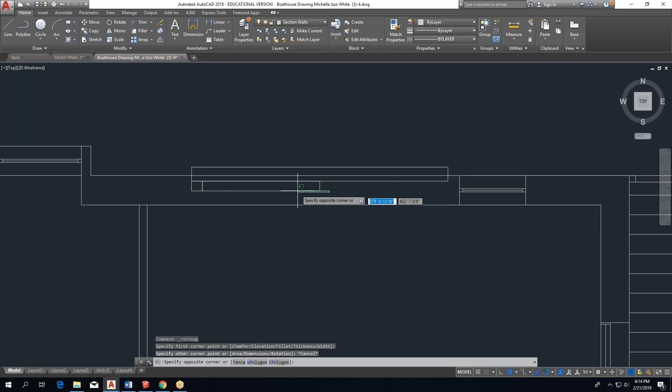So this wall thickness is representative of a lot of things. If we were to really do a cut through of our wall and get inside of it, we might end up seeing that I have some type of brick on the outside, and then behind that brick a 2x4, then some period of insulation, and then another stud, and then some thickness of a facing material. There's just so much going into the makeup of this entire wall thickness, and it includes whatever your interior finish is for this space.

So when we go to draw the walls, we can simply come up against them, keeping in mind what would happen with cavity moments like this created by the columns. This could be a really fun cutout thing where we have a column in here—let's say it was wood and then it comes and meets with drywall—I could build something unique on the other side of this wall, like a shelf.

So in this area, let's say this was like a sitting space—oh, there's this nice shelf, and it makes sense that I have a door that's recessed and I'd come and enter in this space. Or if I don't want to build in all these fancy things, it's okay sometimes to create dead space that you finish off and then finish with a hatch.

So if I offset 5 inches—I'm just teaching you in the world of architecture and drawing right now—I say okay, I'm going to build a normal wall that comes flush with this column. You might see the change from column, or I could even specify plaster to this face as well. But whatever the cavity is between this room and this, because I just wanted to fill this so it'd be a nice straight space in here, I would end up having to do some type of hatch work.

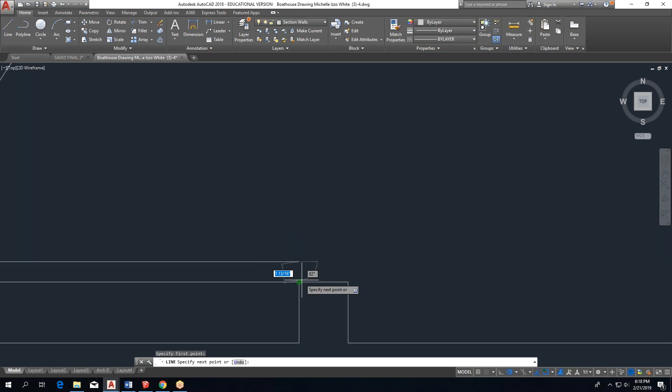And then I have to make sure I trim out the cavity of space in between here. When I trim that out, I'll need to draw my little finish to my door. So this is what a completed door looks like. It has a jamb, it has a thickness, a swing, an emptiness here that shows I'm done and completed and have decided this is my final room space.

All right, so coming into here, the space where I'm going to have my bed - not so important, you get it. The only thing I really need to teach you is walls and a little bit about the rules of the wall. So I could end a wall here because this, unlike that, is drywall or plaster or whatever I want it to be. And then in here, I could either leave this and modify this emptiness, or draw a second wall and make the cavity meaningful.

So I could start drawing cabinets in my bathroom, but really that's secondary and less familiar than drawing cabinets in my kitchen. So now that I've shown you how to draw some walls, and we get that they're 5 inches thick, let's have one more note about the double thickness.

So if I said 5-inch thickness for non-plumbing walls, and for plumbing walls that are back to back, 8-inch thickness. That just means if this was going to be a bathroom, just as I have it in my extra drawing - here's a sink, for instance, and here's my wall behind my sink.

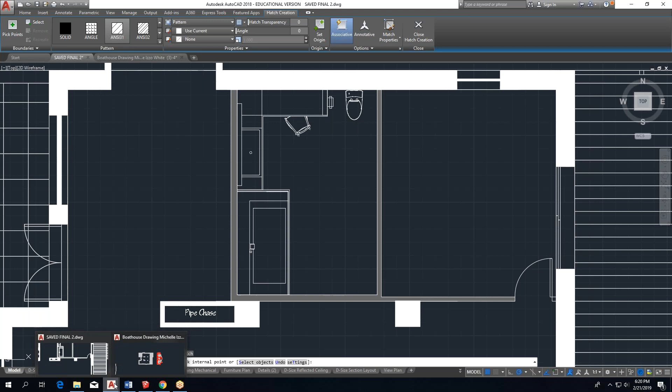And just so that's even clear, I'm going to hatch these really quick. I say really quick, but we all love the hatch tool as it tries to figure out its life, and we just hope the wheel of death doesn't come for us as we wait for it to think hard.

Didn't like it. Basically - just in case so I don't lose it, I won't try to hatch it again. But here's my sink, here's my wall. What I'm saying is if you had this same setup on the other side, I'm going to mirror it about here and copy it.

Okay, and then we had it on this side. We couldn't just set it right up against that other 5-inch wall. There has to be more space to accommodate this much plumbing.

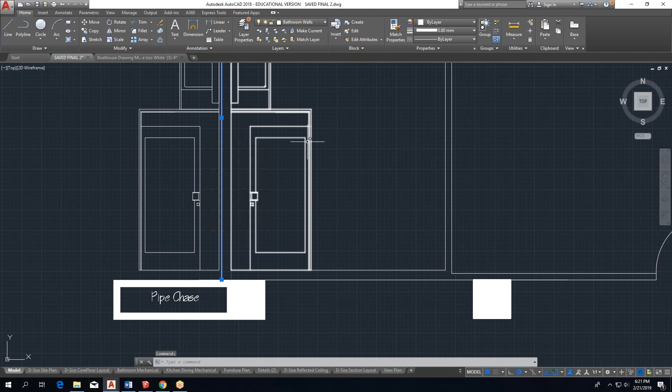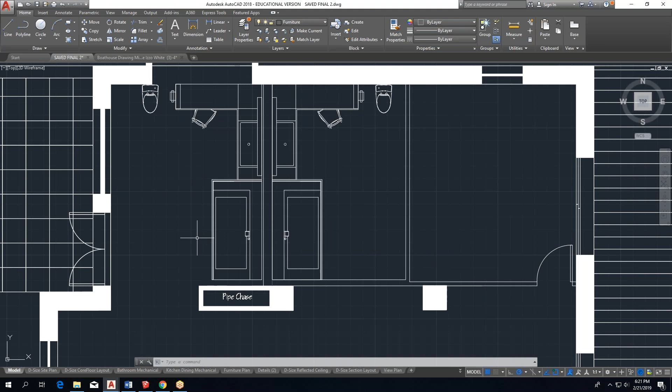We had the plumbing coming off of this chase, so we've left a good connection point on this empty part where we're going to have the main of our pipes. It's going to connect into the wall, but there needs to be added thickness for the back-to-back plumbing of these tubs and vanities. So I'm going to move this wall thickness out 3 inches to make it an 8-inch thickness, and it would end up looking something like this. So wherever you have a sink and a toilet sharing walls on opposite sides, we need added thickness for that shared plumbing wall.

Going back to Michelle's plan, I have a nice empty kitchen area where I could start drawing some cabinetry. I know that for my cabinets, they are 24 inches deep. So I'm going to start on this side of the window, actually in alignment with it - it's a nice clean marker of where I could draw some cabinets.

Before I even started, maybe you're wondering how you would lay things out. This is a visual line for me. If I was going to start a cabinet, I could say the middle would be nice, from the far end, from the inside end. I wouldn't start it randomly 4 inches into the window - I'm always thinking about how it would look in elevation as well. But is this a nice measurement from here to here? It's 16 foot 6, so that's a good measurement.

But when we think about cabinetry, we also have to think we have 30, 36, 24, 15 inch sizes. So will it be a nice clean measurement working my way from here to here with 16 foot 6? That's totally up to me and how I want to build my cabinets.

But what I do know is this 24 inch depth. So if I start again from this nice clean edge of the window, say 24 inches up, and then I could start drawing my line over this way. Maybe I'll just start by having this and say I want cabinets along this full wall.

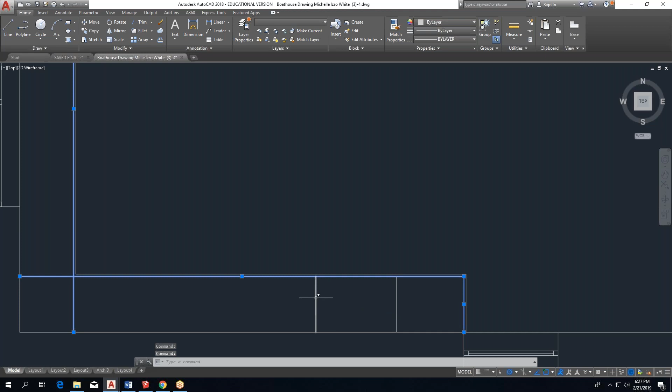So that means I have to change these to be dashed, and that's done using their individual line types. There's two ways to go about this. You could draw everything and know that you're pretty good at keeping straight what's really countertop and what's really cabinetry. So I know this is all cabinetry so far. So I could select it, and at any time, as many lines as I want to, I can right-click them.

Right-click, properties, and then if I go into their line type, I could say this I want to be dashed 2. Dash 2 is better than we saw. Dash is a lot chunkier. Dash 2 reads as a little bit less visually big for the size of the cabinetry. So I'm going to do dashed 2 and just let it be dashed 2.

Now what happens is you noticed when I had multiple lines selected and we were in their properties, it says certain things vary. So their heights in the X and Y, maybe their layers vary. Eventually we want these things on a correct layer. Now that's totally up to you. You could want it to be on just one layer, kitchen cabinets, or you could do it where you have kitchen cabinets and countertops on a separate layer and drive it like I'm doing by line types.

So let's look at it how I'm doing it. Right now they're on random layers. If we created a layer, and I'll say kitchen cabinets, or let's just say kitchen cabinets in general, since I'm trying to be really general. And then I'll add another layer later, kitchen countertops. Okay, just to show you a different way after this.

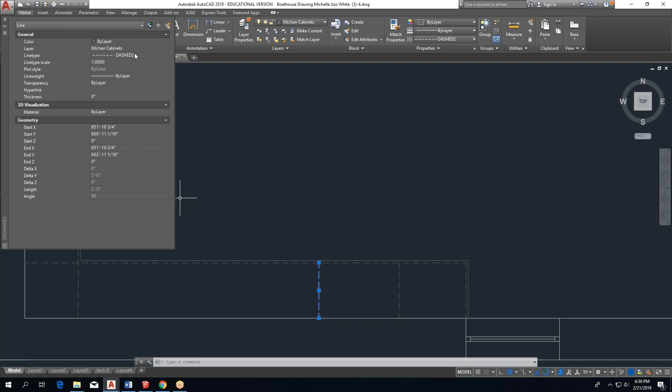But notice if I click on this line and I right click properties, it says kitchen cabinets. The line type is by layer. If I click on the dash and I right click properties, it says kitchen cabinets, but the line type isn't driven by its layer. It's been automatically set by me, the master CAD person, to DASHED2. So that's saying it's deviating from the standard of the kitchen cabinet.

So I could go in and manually do all of this work and pick what I want to be dashed and pick what I want to be straight and have all these things turn off, but just have some of them manually dash and be on kitchen cabinets.

Another way that I could have gone about it is to have a layer that's kitchen cabinets and then have my layer properties, a layer that's kitchen countertops that has a line type that's not continuous and is in fact dash 2. So if I go into its line type and then I change that to dash 2, if I make kitchen countertops my active layer...

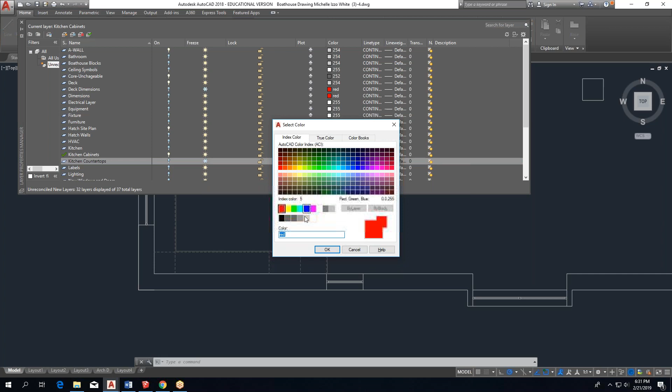And let's make it a not ugly color. Let's make it just a normal gray for now. So it's 251-2. Mine was frozen. I'm unfreezing it. And then I'm going to double click it. It says, and we're going to turn it on. So mine needs to be light bulbed on. Now it's active, kitchen countertops.

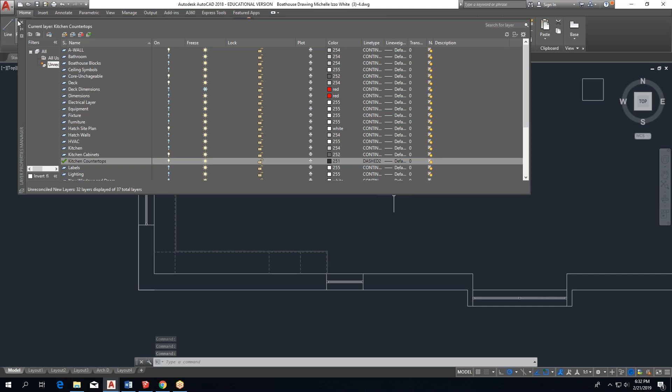DASHED2 has been set in its line type here in the layer properties. If I go to draw the line... it automatically knows that anything on that layer will be dashed. That will prevent, if you're someone who wants to be extremely organized and doesn't want to have to go back and manually change things, you can do that. I'm more in the moment like this, and as long as my cabinets turn off all at once, because that's all I need them to do for future plans, I just do it on one layer. But you can totally have a layer where color and line type is driven by the layer itself, instead of going in and manually making some things dashed, while they all sit on the same layer.

Does that make sense, the difference between those two approaches? Just one yes? Any questions? Maybe that's a better way to say it.

All right, so if I'm sitting here, I've got my cabinets underneath, and some solid lines representing the countertops that sit on top of them. What about upper cabinets in this situation? What kind of lines would I have for those? If the countertop is solid and sits on top of the base cabinets, which are hidden, and the upper cabinets sit higher than the countertop, would they be dashed or solid? Who knows?

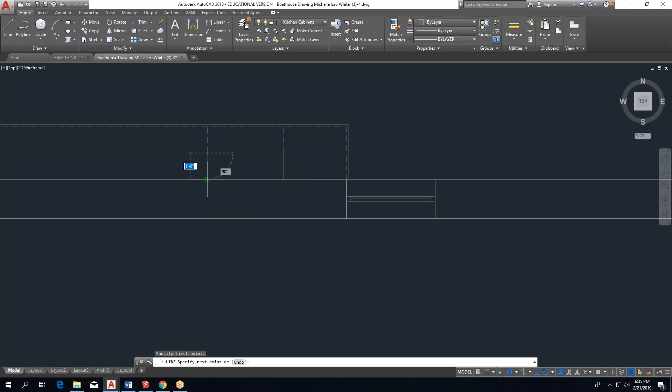So if I had a 30 and a 36, I could start doing a similar offset. I could take from here and do a solid line—say there's one above that matches with that, and a solid line here, there's some above that matches with that, and continue across. Now this might be one up here that has doors that open out, so they'd swing left and swing right, but it's still just one cabinet with two 15-inch face doors on it. You wouldn't separate them into little squares just because there's two sides to them—it would be a continuous cabinet.

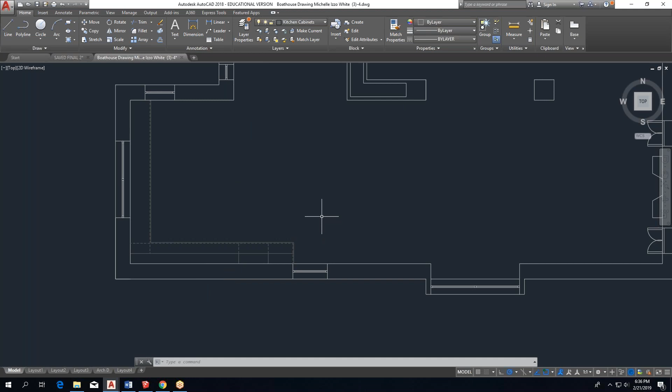But what really matters is upper cabinets are solid, lower cabinets are dashed, and the countertop is represented as a solid line as well. Two ways to control it: all on kitchen cabinets, or by having a kitchen cabinets layer and a kitchen countertops layer, where kitchen countertops is dashed and kitchen cabinets is purely solid. Right, it's a lot to keep track of. But it's really not, because it's all pretty simple after that.

The only things different than the bathroom are the sizing. Here we had a 24-inch offset, and then including the inch, 25 inches to completion. But in our bathroom, vanities are a different depth, usually 21 inches deep. And if we add that extra inch, it's going to give us 22. So if I want to have a good layer, I could create a bathroom cabinets layer on which I do everything—bathroom cabinets.

And boop, I could come out. If it's still defaulted to this, I'd have to set bathroom cabinets as my main layer. Could start drawing. I'll just start from this lower wall in here. I'm going to come over 21 inches under and start drawing up, and I'm just going to complete it to here. I have no idea what size that is, but I just want to give you the idea of the depth. So when you measure, it should be 21 inches.

Let's see. And I'll confirm it with an offset, 21 inches, or I could have started with an offset. Your choice. I think I did a little bit too much of a pull on my first one.

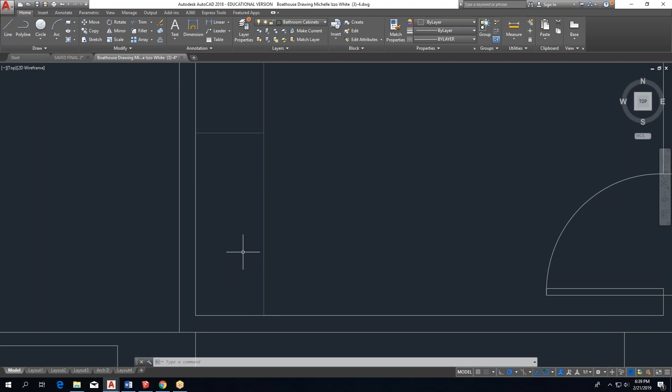This is where my little sink basin's going to go. And then I could have this just be open underneath. It could be like a vanity where I'm sitting there, kind of like a desk to put my makeup on. It could have one drawer, so it might not even have cabinetry.

This one, and for the whole thing, I'm going to need a countertop, which is going to give me an added inch of thickness, so I'm going to offset 1 inch. And again, you could do it on the side or you could have it end on the face. That's totally up to you and how you want to finish your things. I'm filleting the corner.

And so in here, I would have my 30-inch sink basin, and it's going under my countertop. So all these lines so far would need to be dashed. I could create a new layer that would be my bathroom countertops and then change its line properties. So this time let's do it that way, because that's the way I haven't done it.

So I would say layer properties, bathroom countertop. And I'm going to show you how, hopefully, changing it here and then selecting them and putting them on the layer should change things. So if we change this in here to be dashed and click OK, and then we make this the active layer, close out, and select this, this, this—and we haven't messed with its layer, and we haven't done the right-click properties stuff—and we just go and put it on bathroom countertops, it should change all of those lines to be dashed because we put them on that layer and we haven't changed their properties individually. So that's another way to do it.

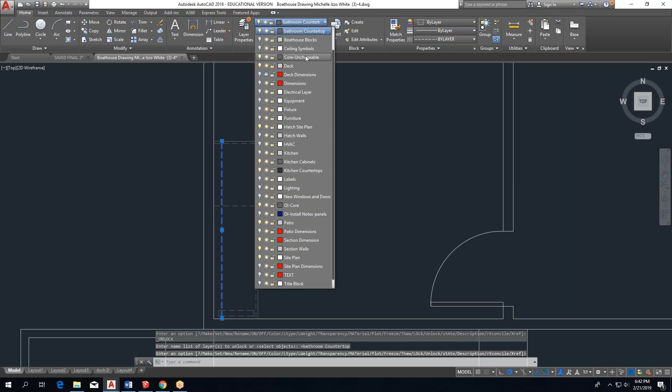Oh, I know, this is good to see. So if you ever lock a layer—see how this is locked?—you've got to unlock it. It didn't want me to move it because it was locked. It's as simple as unlocking the lock.

So now I could have that big vanity cabinet that's running my entire length, which is kind of silly, but it would be solid. And if it is running the whole length, I would not see this portion of the cabinets that's underneath it—it would get chopped off, or I would move the node.

Allison, I have a quick question. So for space plan, I already put in a couple kitchen blocks, like for my sink. So for the upper cabinets, for that solid line, would I need to erase part of that sink block? Not a block that I built out?

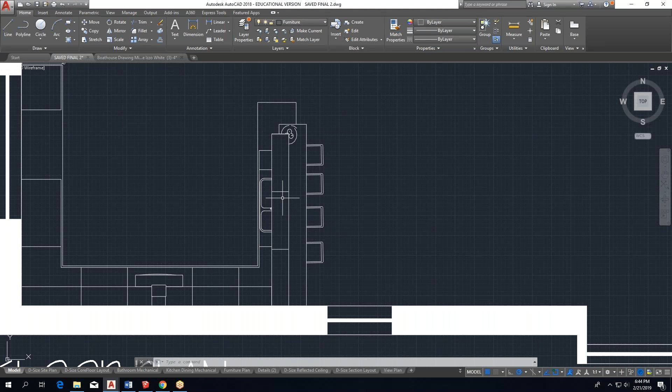Yeah, so if we go back into my saved final, you can see how it would look. See, you can see my sink, but here I have a floating cabinet that's attached to the ceiling, and it'll cut off where you'd see the handles. It would cut off anything below it that you wouldn't see because of the edge of those cabinets.

So coming back in here, that completes all of the rules for the bathroom cabinets. Pretty simple, I mean we might end early tonight because I'm making this way simpler than usual. So kitchen, bathroom: 24-inch standard size of cabinet, 25 including countertop, uppers solid, lowers dashed, countertop solid. Bathroom, same thing, different depth: 21 inches for our cabinets, 22 to the finished edge with the countertop, that solid countertop line.

And then of course the rules of cutting things off that you don't want to see. I'd in fact want to cut off this little foot too, so that I wouldn't see it as much, because it'd be underneath all of this.

Make sure when you're drawing your walls that you're putting your doors cut out fully with their swings and their thicknesses. And then for closets, I said you could have pocket doors or folding doors, but if you have doors, you draw them correctly. So I don't know how many doors you guys have drawn, and some people in this class aren't in space planning to see all the really fancy stuff that goes on in there.

So if I had another opening, this is the messiest way—look at how funny this is. There'll be one giant wall and then one little wall, and in between this gap, a strange gap, I'd have doors. I could take some folding doors—this is my folding door, and I'm going to mirror this.

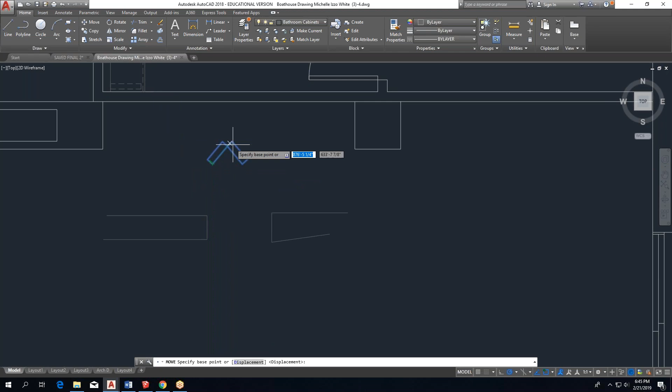And that could be one set of folding doors that I move into position, and they hinge at their center. Now the rule about folding doors is, let's say if I have two—if I actually unfolded these, they should measure the distance of this gap. So if I was going to draw them in reality, I would want to measure this strange gap, 2'9" and 13/16, and then take that measurement, divide it by 2, and create two rectangles that are those half measurements and hinge them.

So that would be something to be very precise about, because sometimes I'll get people who give me a gap like this and they just really quickly draw a door and then a second door, and it becomes this unbelievable thing that's also kind of jutting into their space. Make sure they're rectangles, not like this mess I've got going for myself. Clean drawing habits will go a long way and will be checked for in both classes. So if you're spanning a gap, we want this unfolded length of these two things pushed flat to be the clear space of this gap.

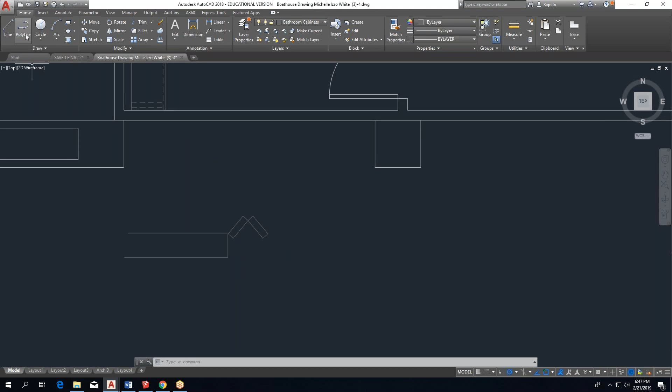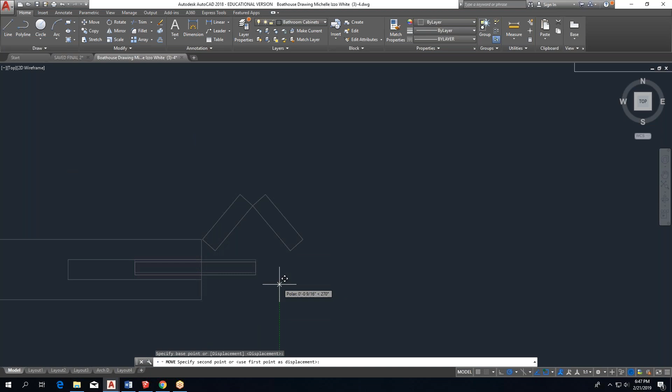A pocket door is represented—you might have a cavity on one side. So if I went over here and offset 2 inches, totally arbitrary by the way, I'm just creating myself a cavity for my door to come into. And then I would have the actual pocket door that could go into that cavity. And I'll move it into place so you could see how you'd be using the door.

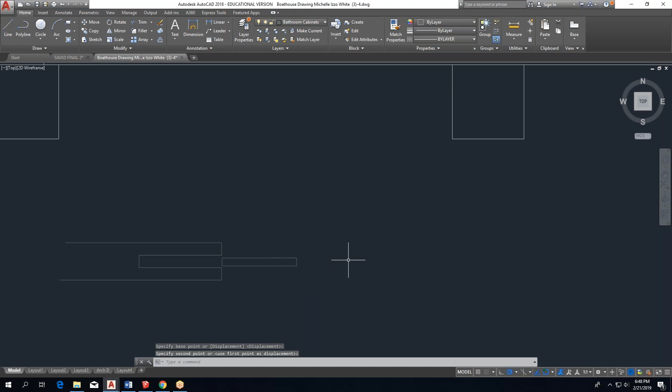Our CAD should tell us something—that means secretly I've got to remove this ugly line here. And then people get the idea of, oh, this thing could slide in here, or it could slide out and be the size of the clear opening. So you'd have your opening meet up with it on the other side over here. Okay, so whatever kinds of doors you want to use, just make them believable. And if you have a question about how to draw something, you can always ask as well.

Closets, that was another thing I wanted to talk about drawing in CAD. They're 24 inches depth, and that 24 inches depth is of clear space, not including wall thickness.

So for instance, if I have my little guy here and he's 24 inches, that means I can't just say the closet's going to be here, draw this over and up, and offset 5 inches. No, the measurement of this empty space inside the walls has to be the full 24 inch depth. So this is going to have to move down here, and then the walls could be built. The gap itself is 24 inches.

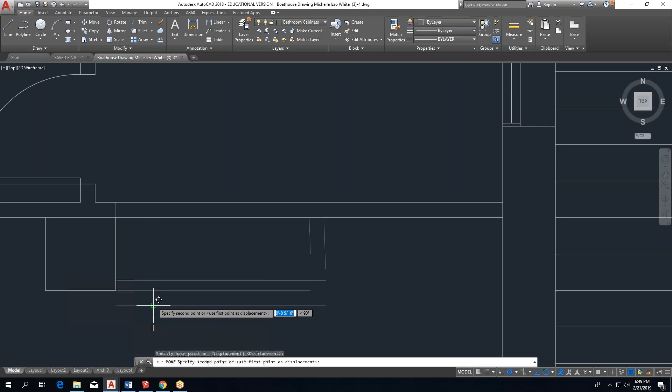Now, if I clean this up, I gain some space because of the thickness plus the column's depth. So you're going to have a lot of weird things in this house like that. If I gain my 5 inches plus 24, then I get to come in at least 5 inches on this side because of the 5 inches I gained right here. So I could fillet it all off and make it all clean.

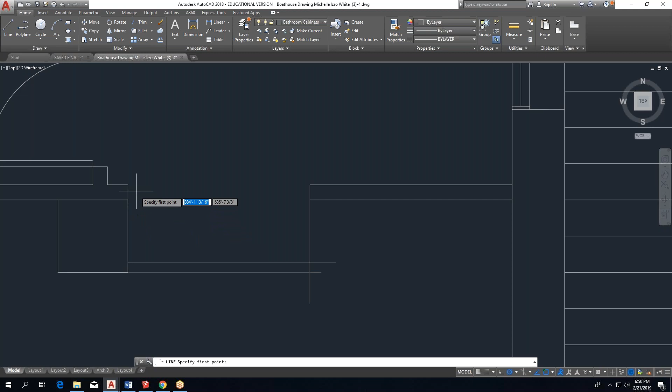Let me clean it up a bit and show you what the appropriate end would be. So trim from here to here, enter, and trim out this first line and trim this one out. Now I'm going to just draw one from here as a guide, offset 24 inches, working quickly. It's my keyboard, the inch key sticks. And move this up to be the real 5 inch.

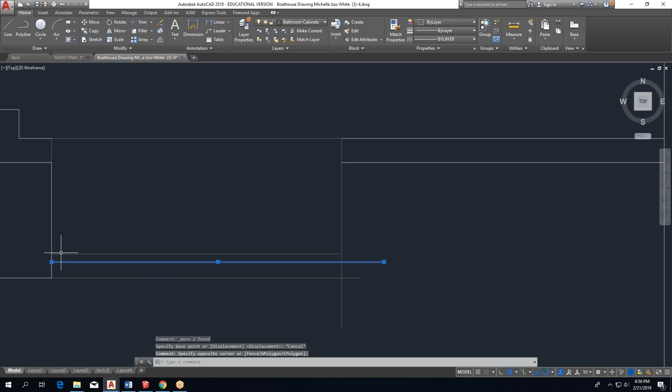So I do this, and now you see this is 5, and this is 24. So from here to here is 24. It included the thickness of the wall, which is fine because the depth of the actual space is 24. And that allows me to have this really nice clean alignment with my column. And then I could finish up my wall on the right side, offset 5 inches.

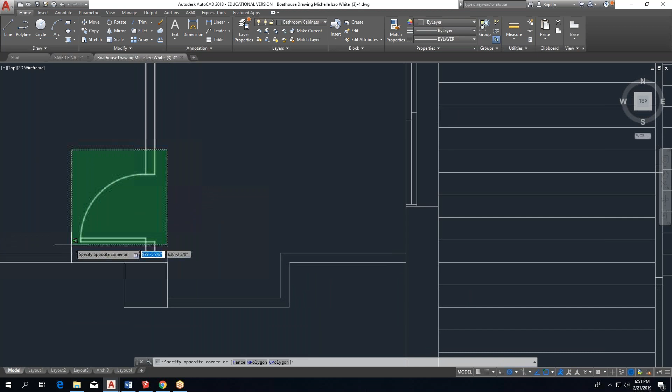All right, so there I'd have a closet. Now I would have to have some type of doors on my closet, so a line does not suffice. In my situation, I'm in trouble because I'm real close to this bathroom door. But if I wasn't, and this is the magic of CAD, yay, totally fine, then I could have doors that swing out. Still, I'm too close to this if I want them to swing out, or I could have those folding doors.

So if I did a measurement from here to the other side, I'd say it's 5 feet 2.5 inches. So half of that is going to be, half of 5 is 2.5. So 2 feet 6, 2 feet 7.25 inches, I think. That's me doing math in my head. Good luck to us all. 2.7, 2 feet 7.25, 2 feet 7.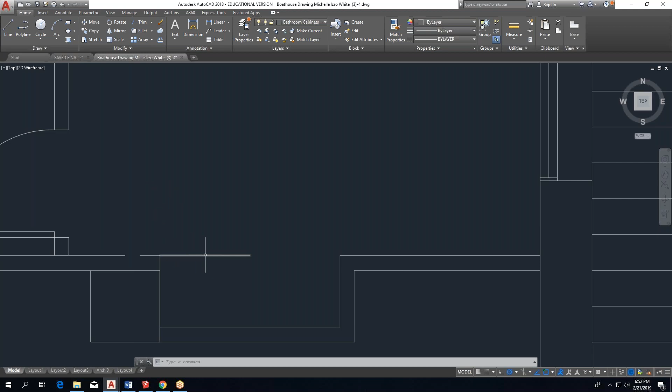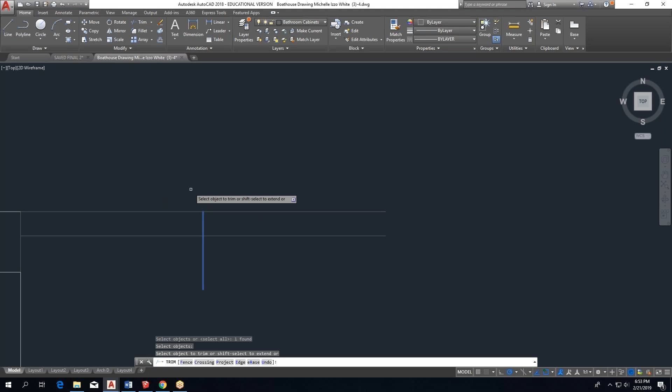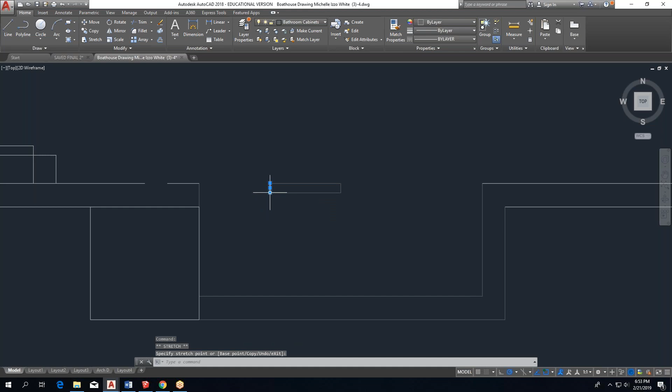7.25 inches. Okay, and if I put that down here to the middle, I could have even just drawn a line across, found the measurement, split it in half. So that could be half, and I could have 2 doors that swing out using that measurement, or I could take this and split it in half again. So if I draw a line here, give it thickness, offset 2 inches, enter, and trim from here just so I get 1, that's that measurement. I know you're kind of like, tonight I'm a strange, evil genius. It doesn't make sense, but it doesn't really matter as long as you see the end product, and you get that I did half of this opening, and now I'm taking half of that and making a cute rectangle. That's all you need to know. You could make it however you want to make it. I'm just doing it my fast, odd way.

And then I could rotate it 45 degrees, and I could mirror it, and actually let's mirror it the other way, so then it's ready to just push into place. Mirror, enter, and I move it. And that would be the clear space. And then I could copy this all over to the other side. Copy, and there you have it. I'd have those cute little doors that when unfolded would close and everything would work out.

So that's what a folding closet door would look like for our closet. And then, you also want to be thinking about shelves. It's usually about a 12-inch shelf. A shelf is going to be shown as a solid line, but a rod beneath the shelf would be shown as a dashed line.

And I've seen it represented in some of your plans as just if I did this. We could right-click properties, and in here, in the line type, we can change it to be dashed.

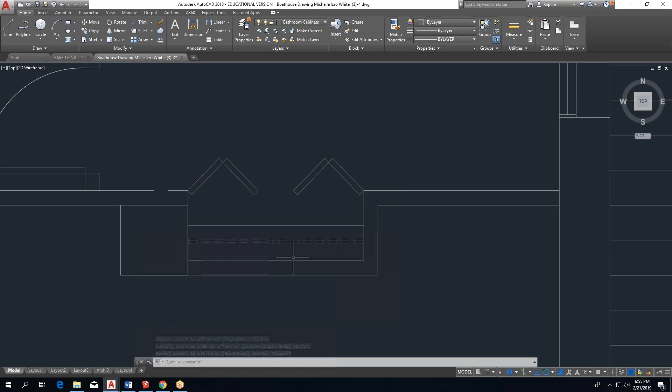So we could do negative 2. I've seen some of you represent it just as that, but I like to give thickness to things so people never question what they are. Like if it's an inch thick rod, I could offset it 1 inch, enter, and if you do an offset, it'll maintain its properties. Then I say, oh yeah, there's an inch or a 1 foot shelf with a rod at its center that you can't see hanging beneath, and it has its doors, and that's a finished closet to me that I would accept as a fully drafted closet.

All right, you could have doors that are sliding on a track, so on and so forth.

Okay, let's take a look back at our homework. So we drew in our walls for our plan, and we drew a master bath, we started it anyway. We talked about 21, 22, and we talked about all of the different types of lines and depths for drawing in our kitchen.

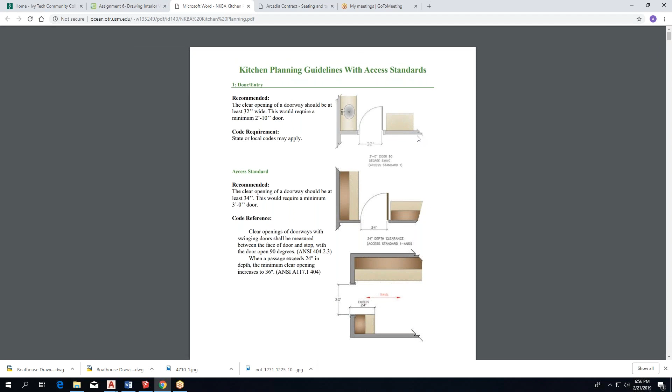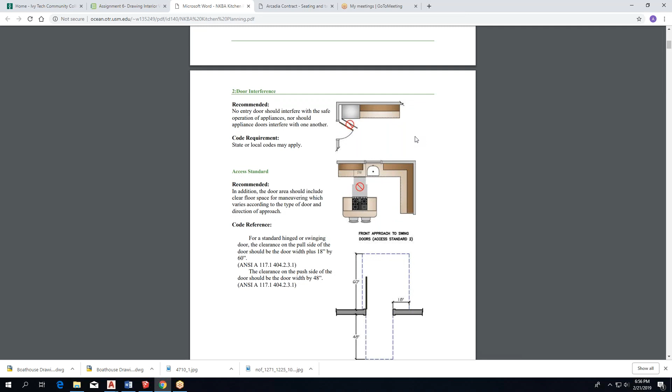And I've included for people in this class who aren't in space planning just a quick planning guidelines with access standards link that does really basic stuff. So it talks about recommended clear opening of a doorway into a kitchen, just so they have the opportunity to follow the guidelines as well, since Cheryl will be looking for them and I'll be double checking them for the other people. I would love to check it if you just want to practice that.

I used to teach kitchen and bath. I taught it twice, and I've also done independent study in it. So you could talk to either me or Cheryl. She's probably more up to speed because I haven't taught it in many years. But this is for everyone to use and just look back at.

Here's that dashing of the work triangle. So a work triangle traffic, between our range, our sink, and our refrigerator, there's certain types of distances that are acceptable. And we want to draw our triangle in, so it's from center of sink to center of range, to center of refrigerator.

If I go back to my saved final two, I would be totally fine with you putting it on that layer where it was kitchen cabinets. Just ignore my furniture because this specific drawing is pretty willy-nilly as far as its layers goes.

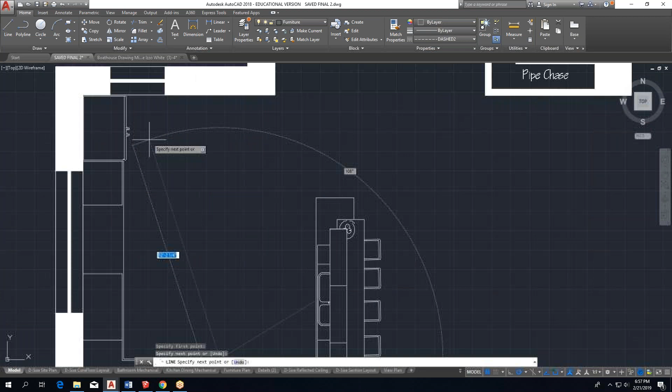But if you have a dash layer, we say, I'm going to start at the center of my sink, to the center of my range, to the center of my refrigerator, and for my people, you can see it is dash, it's just very light. My people who are in space planning have certain measurements they need to check and verify, that the legs of that triangle aren't too long, aren't too short, aren't impeded by center islands, so on and so forth. But that's how the drawing's accomplished. It'll simply be a dash triangle that falls in the middle of the plan from the center of those appliances and fixtures.

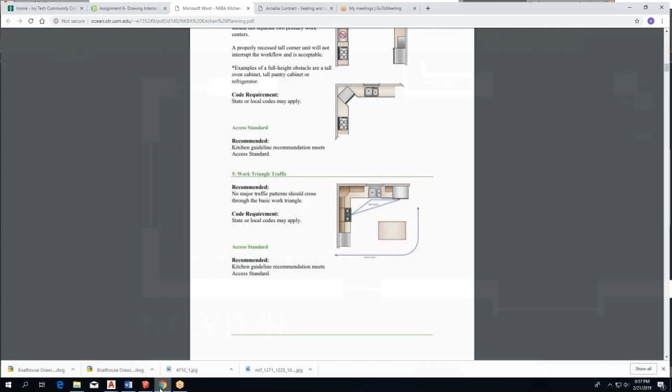All right, back out here. So the next thing I'm going to show you is tracing an image and using the dimensions from a site to scale and draw. This is really seemingly random, but it's very handy.

You still don't know why you should trust me. I never did my, this is me and here's what I did, but I worked 4 years in the contract industry in one of the 2 local companies available to us in this area, this being Mishawaka, Granger, Elkhart. There's only 2 large companies where you wouldn't have to go to Chicago to work. And I was in charge of healthcare and education, offices, tons of stuff.

I did all sorts of things, and someday I'll show you a PowerPoint where I've done everything from design a custom $100,000 chandelier, where I used SketchUp and worked with a designer out of New York, and we talked about rise over run with the stairs. I showed her my designs and we'd say, how plausible is that? Then we picked colors and materials. So like product design, I've also designed rugs locally with other companies, and then I've done offices, nursing homes and so on. I used CAD all day, 8 to 5, for many hours in a week.

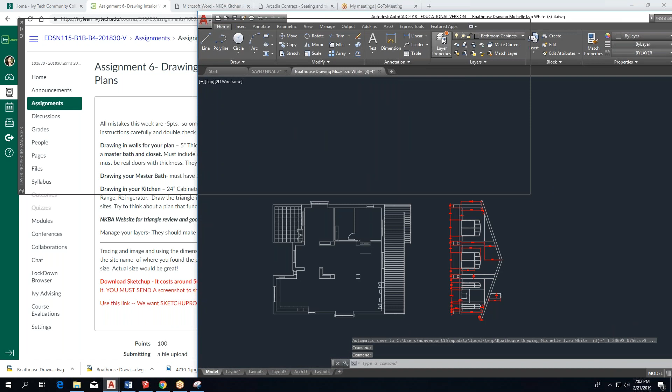I believe, just so you're on the same page as me, it says this should be drawn on a new layer called image layer. So in CAD, if I go back in, I'm going to create a new layer and call it image layer. I'm going to make it red just because I want to be able to see it really clearly, and then I'll make it active and close out.

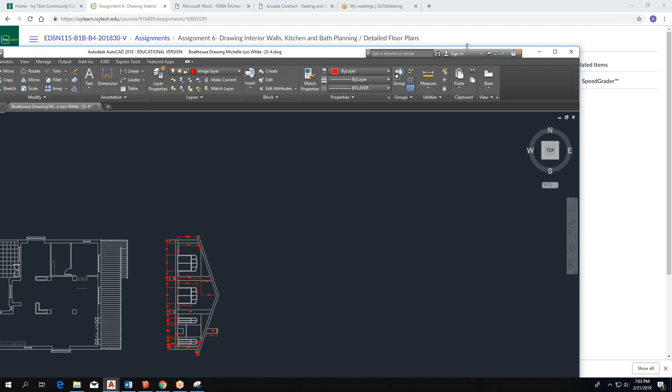Now that I have it all ready to go, I can draw my line — we said 24.5, 24.5, enter. It's not that big. And then I'm going to drag in my image of my chair.

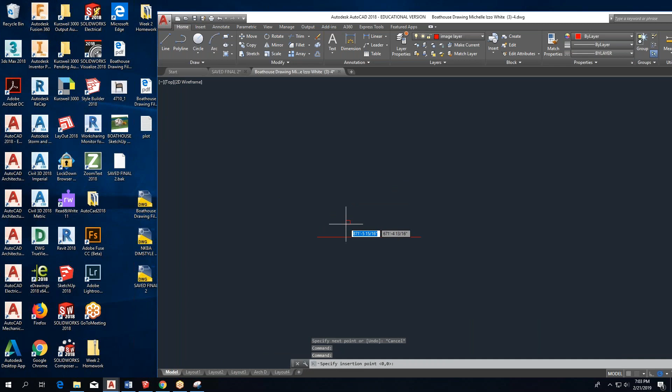So where I see it right here on my desktop, I'm just going to drag it in here and click on that piece, and we'll see how it drops it in. Oh, it was going to do it — that's awesome, so it was a little bit different than earlier.

So if I just drag this and drop it somewhere and click randomly, it's just letting me place it. Let's even do it that way so you can see what happened — if I dragged it and didn't drop it nice and close up here, then if I click on its outside boundary, it's going to pop up this menu, and it says you could create a clipping boundary.

So if I create a clipping boundary, I'm going to zoom in and clip it so that I'm basically getting its overall width — inclusive of right here to as close to the edge of the chair as I can get. That's what I'm calling that. So when I move this, I can really see how wide it's going to be. Then I'm going to move it into place up here.

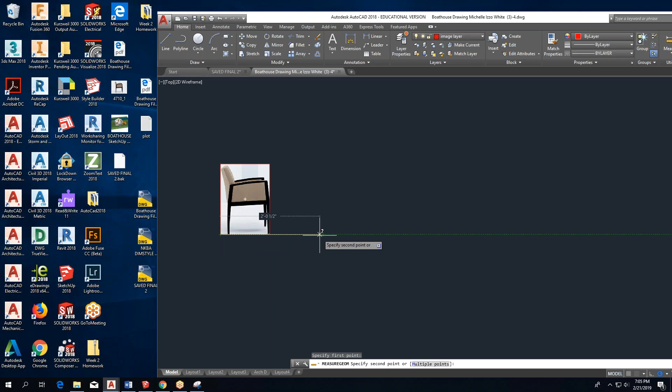This is my 24.5 line, remember—I gave myself that as a base measuring line. If I measure from here to here, it's 24.5, 2 feet half an inch. So if I select this again and go to the Home tab and then to Scale, I can start to scale it up.

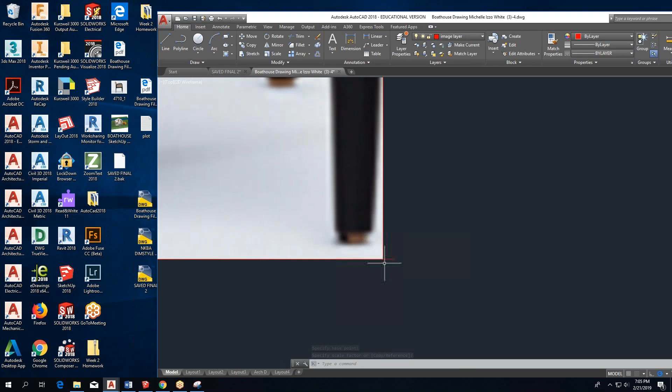I'm going to just scale it up. You see how I stopped? I was looking to the right and was so close to hitting the scale of that line. You want to be as close to that line as possible, but let me show you what just happened—I'm scaling this chair up by the width measurement, measuring against my elevation.

It's as much an elevation as it's going to be for what it's doing. So if this is 24.5, let's go back out to our website. It says the height should be 33 3/4 inches—that's to the top of this here, because otherwise it'd say arm height.

So if I drew a line from here to about here-ish, it's going to want to snap to the top of here. I'm going to make my screen bigger and turn off my object snap so you can see what I'm doing, since it wanted me to snap to the top. So I start basically at the bottom here and come up right to about here, and now I've got this line.

So what does that measure? I'll turn my snaps back on so I can snap on my line—from here up to here—and it says it's 2 feet 8 inches, so that's about 32, almost 33 inches. Do you see what I did there? Do you see how I picked its width?

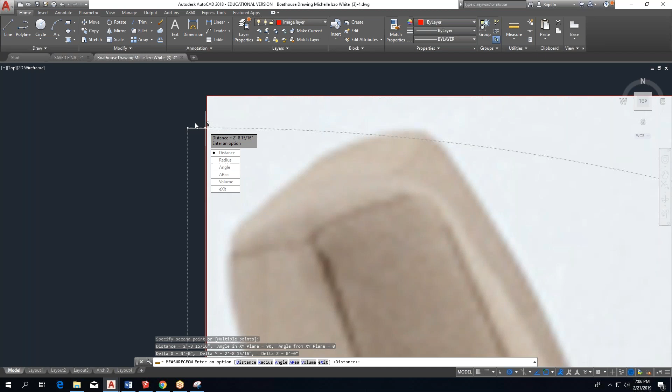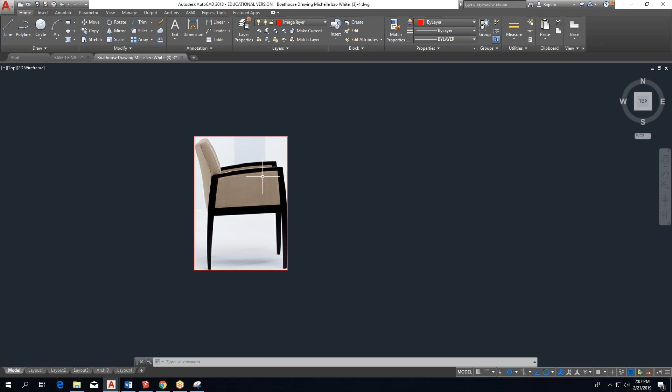I took the image and measured or scaled it to be a similar width. Since everything in here is drawn 1-to-1, it took that image and at a 1-to-1 scale made it so that if I trace this chair, I'm drawing its elevation appropriately to scale, and I could use it in any elevation drawing for my house, knowing it's at the right scale.

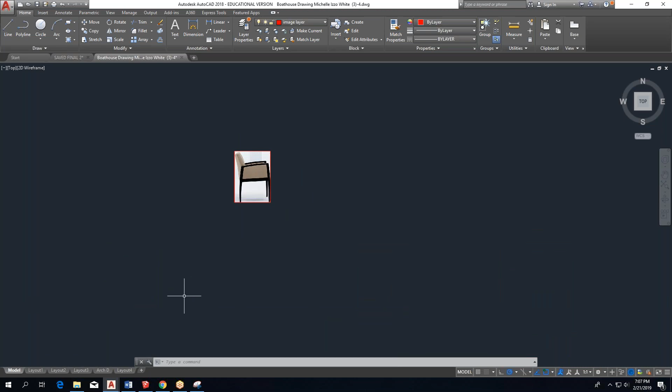It's a super weird and seemingly simple thing that's very, very helpful to understand if you're not bringing in a block. If you brought in a really cute block, it might not be the exact chair you want, but this is a good way—if you have a company that has multiple views of a chair or sofa—to go about using it to draw the reality of the object.

Now that I've got this in here and scaled it close enough to be perfect, I would have hit on this outside line and there's just no way. All I did there was make my box a little bit bigger—you saw that it dragged the white space, see? So that didn't make the chair bigger.

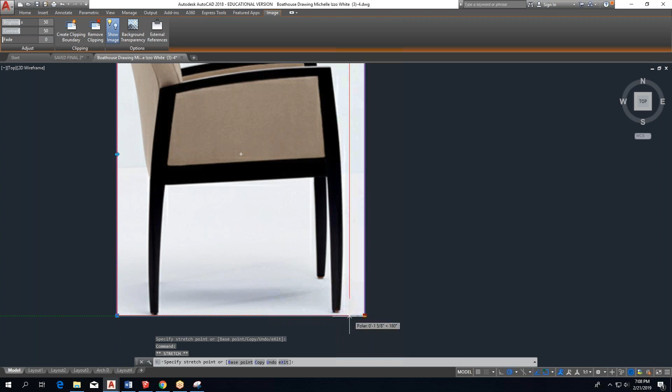The scale tool, which is under here—if I say scale, going like this, I can make it way big. Or I could grab it, go to Home, then scale it and make it way little, but you're going to see that's super frustrating. So if you make it way big, you're like, yay, made it way big. Now our line is way down over here somewhere, and it's hard to find.

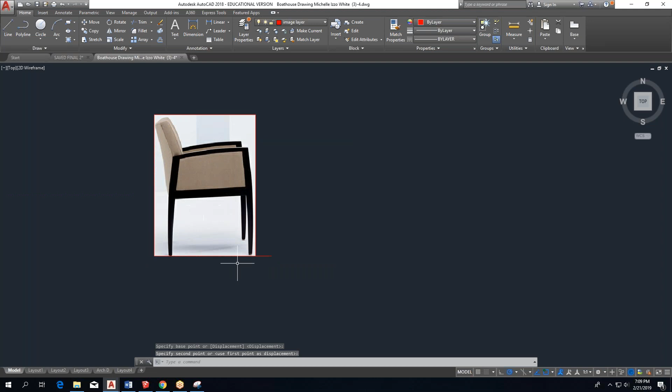So now to scale it down, I have to type decimal percentages going backwards—I could say I want this 0.75 smaller, and keep doing that until I get as close as I can to the size of my 24.5. But it's really easier to bring the picture in smaller than your 24-inch measurement. If I move this, you can see how small this line is right here, and if I move it back into place, I could keep going down, down, down—then go to Home, say scale, click about the point, and say, nope, 0.80 smaller, getting smaller and smaller.

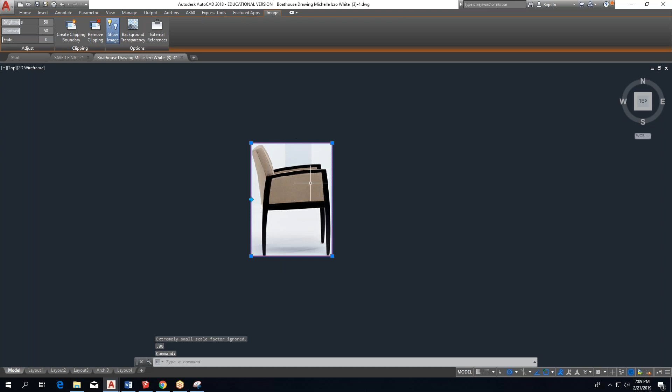And you're just guessing—that's the thing, that's the weirdest thing about this. You'd be guessing to get it smaller and smaller until it hit back up to this line.

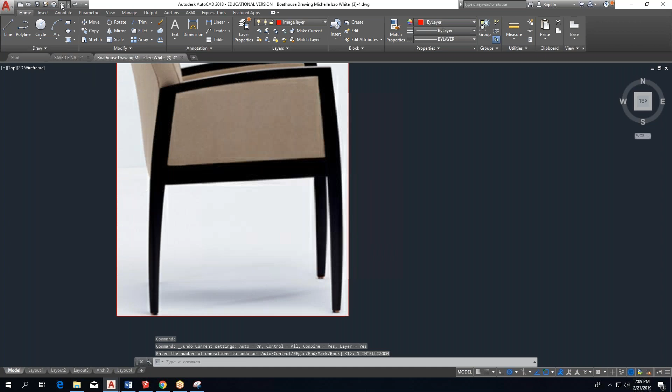There's no real science behind it besides scaling it until you match the edge of your original 24-inch measurement. When I had it this close, that was close enough.

For your homework, when I measure it as your teacher and check what you've included, I need to know where you found it. So on a new layer, you must scale the furniture within 2 inches.

I was within 2 inches of being correct with the chair, and that's not hard to do. Include the site you used to scale and draw from.

Include the link to your chair or furniture piece. That way I can go to the site and check which piece of furniture you grabbed.

If we go back to Arcadia, you cannot use the chair I just did, okay? I want you to find your own image, just to get used to site navigation and this idea.

So if you go back to guest seating, you could pick something like the Nios if you wanted, and see if it has a good enough picture.

This is pretty close to elevation. This would be like a very complicated chair, even though you could probably find it. You could use this one—actually, it wouldn't be too complicated.

If you brought it in and used the clipping tool to clip it from the foot to the top of the chair, you could give me a front elevation of a chair.

Once you get it in, your job is to trace it. So on your image layer, you're going to turn it into a CAD object.

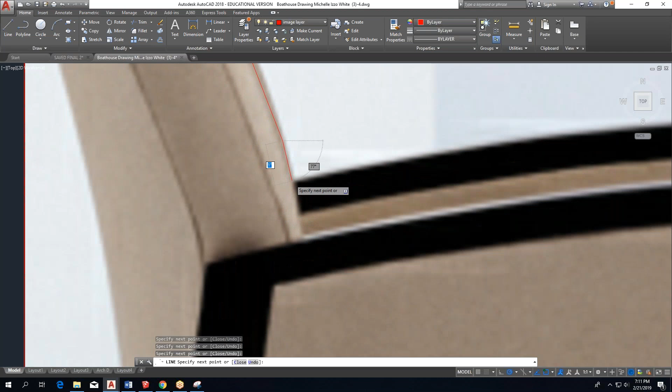It's this tall, and you can use arcs and whatever tools you need. You're just going to slowly trace your object until you have a CAD drawing.

You can copy that off to the side for me and include the link. How are you going to include the link? You're just going to include it as text.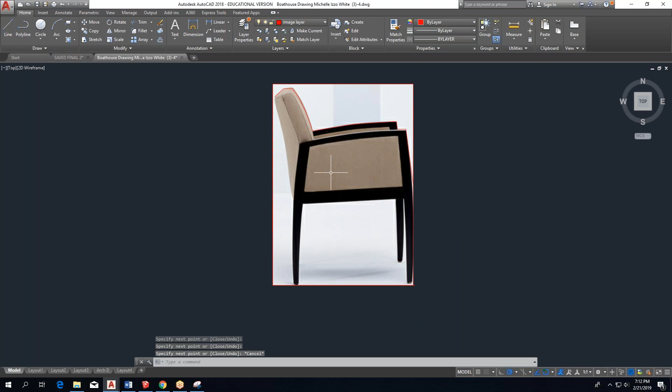See how I'm doing this? In the end, you'll have a finalized drawing, and an image that, if I move it, will show the fully outlined chair.

So I'd have all the outlines of the paneling and all the little detailing outlined, and then you're also going to include where you found it.

Right under here, you could say, this is my link to whatever this was. Copy it, and it should take me to the specification portion of the site.

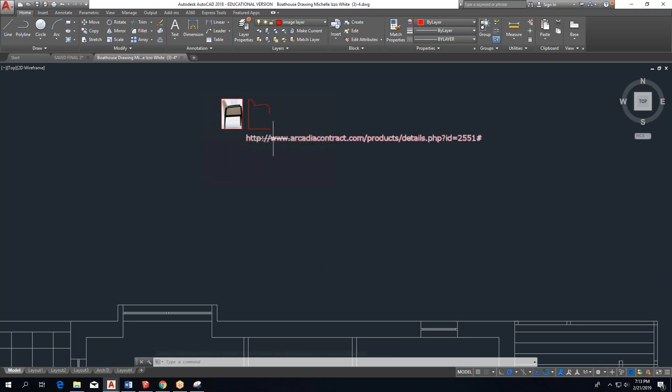So I Control C, Control V, and this is what I will see somewhere in your drawing—the original image, the tracing—and I'll be able to measure it against those specifications and see that you understand how to scale an object.

What we really use this for, more than elevations, is when a client comes to us with plans from the 1800s—which has happened to me—done by hand, never done by CAD, and needs them scaled from a printed copy.

So I scanned them in with the printer, took that JPEG, and traced over all the line work to make it into a scalable CAD plan. So it does happen.

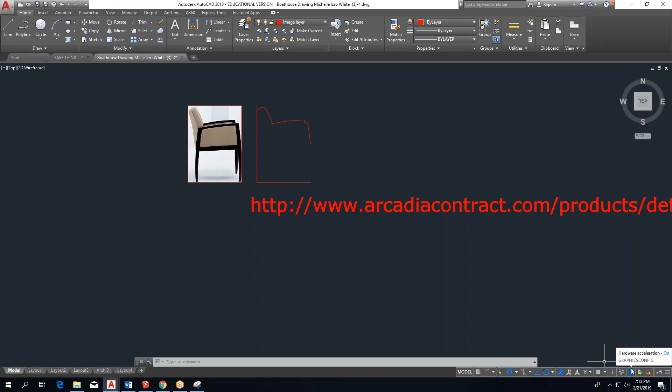This isn't an arbitrary thing I'm having you try—it's really important, and it can become useful later when you're doing elevations for this class.

So this is the last step after drawing your kitchens and baths. For people like Michelle, who isn't in space planning, she's only drawing a finished master bedroom with a master bathroom for me.

And then a guest room that doesn't even need a bathroom—just another room with a bed and a closet—and then a kitchen. And that's it.

For the rest of you, I'm accepting your work for Professor King's class as complete for my class with this. You really shouldn't have separate files for our two classes.

In the end, what you turn in to her for your final project—this sheet set for my class—is going to be part of your final.

So I'm okay with you giving me a big messy file for Professor King's class that has 7 floor plans in it, and simply when you're turning in that same file for me, just put a box around the thing you want submitted for my class, including anything extra in that box. That way you don't have to jump back and forth between the two classes. You should have one working file that you're updating the date on pretty much every week. If you have separate files, start making sure we have one, because as we progress you'll need one spot where you're working and turning stuff in. It'll make more sense once we start creating layouts for printing and organizing everything you're creating for her.

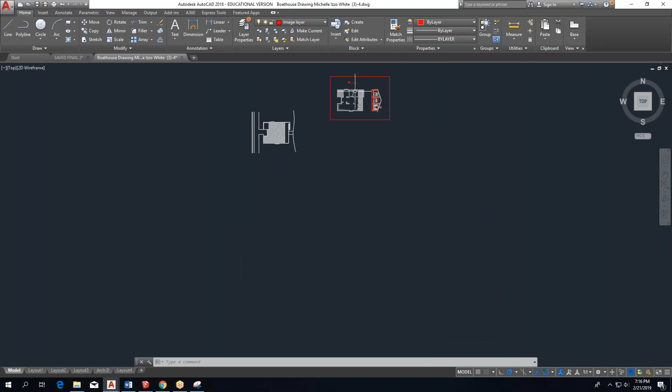So whatever you're turning in to her, turn it into me too, and have the layers clean since you should be being clean about how you're working for her and for me. The box is for when you wouldn't put every plan in there. In this case everything's on the right layers. Sure, you did 5 renditions of the floor plan over here on whatever layer and no one cared because they were quick, but for the final one that's coming to me, I need one plan with a finalized setup. I'm not going to check your individual bathroom versions.

So is she just making you do little vignettes to the side, or would they be in your plan? Does that make sense, Amanda? For the last couple weeks it's been prototypicals—are you now putting them into the actual plan? I think we're aligned now where it's in our plan.

All right, so I hope that all makes sense. The other thing is, eventually—it might be one thing I check with Professor King—I'm just thinking about this week.

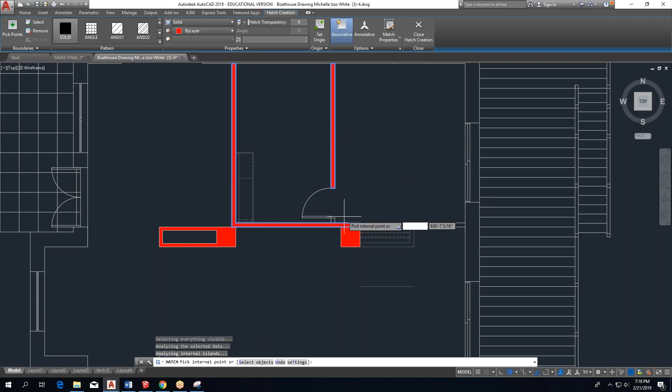Eventually we have to have these walls hatched. So what a hatched plan looks like at the end of this—Lord help us all, because it's going to be red—but this would be hatched, and not this, because there's no hole. I want to say I'm okay with you guys not fully hatching since you're not locking in, and hatching on the computer is such work. But just know that in the end, I've seen a lot of people forget to hatch, and their walls were unhatched and super ugly.

So they left these things unhatched. I'd do the due diligence to clean those up this week at least, if you're not going to hatch, so it's a nice clean juncture and we can tell the walls are connecting to make one room. Whereas it'd be fine to leave this off here because the column connects to the wall, so this could be a closed line. Eventually when it's hatched, you won't notice it anyway—it'll all connect together. But we will hatch it in the end, so be thinking about any extra little lines hanging out.

Do you hatch the doors as well? You don't have to hatch the doors, no.

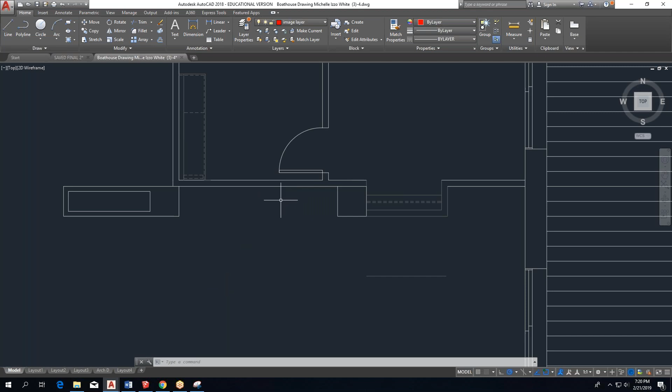When you get into the real specifics of drafting, like the column - I mean, not for this class, we're pretty lenient, although I'm a little more detail oriented than some professors might be at this level. But if your column was wood, we'd use the hatch sign for wood, and for plaster it'd be plaster. But we're just doing solid equals finished wall, so anything finished is solid. The door can stay hollow - it's a hollow core door. That's my reasoning behind leaving it empty.

But I think we're all good. Oh, one other thing - I'm going to post a file that doesn't exist yet. This is everything, so we came down to tracing the image. This is the last step of your homework, and you have to do it or you lose 5 points, because I have so many people who put it off. If it's okay with you to lose 5 points, hey, that's on you.

But you want to download SketchUp this week because I want to start using it. We usually get to use it the week before break, and it's fun to play with over the break if you have it, or even to open it and pretend to play with it yourself, or I could give you a file to look at. Download SketchUp - it costs around $50, mentioned in the email that went out at the beginning of the semester. You need it by next week. I want to make sure that's imperative because I want you to encounter the process of trying to get it.

We always have at least one to two people who have a problem with it - not because of SketchUp, but because they freak out before really going through all the steps, or use an email it doesn't get sent to and find out it went to their spam, so they don't have it for two weeks. So if we're going to experience that, I'd rather do it early, get all the bugs worked out, and be ready to go without panicking later.

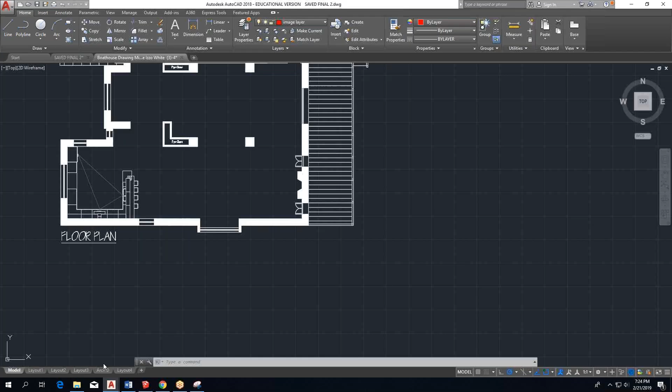Tracing this, just one more file that I'm going to put in here probably by tomorrow, and you won't need it for a minute, is when we're dealing with dimensioning kitchens and baths, the dimension style is different. So I have, again really benevolently, created a kitchen and bath dimensioning style that will work. It's in inches, and it's a little more finicky than the one we already have created for us in the template I gave you.

So if I go into here, how you're going to get it is you are going to open this file, or a file that I have. When I send you the file, it's going to look like this - just one dimension string hanging out, so you know you have the right file. What you're going to do is select it, go to copy, go to your drawing, go to paste, and just put it right there.

And all that did was tell your file that you now have this dimension format. You could even delete this out, and I think you'll still have it. So now that I've done that copy...

If I go under annotation and drop this down to look at what I have, I've got interior design, and here's this one that I need - NKBA dimension style. The one that I want is actually going to be called, because I renamed it... that's how you'll do the copy. The one that I send you is going to be called NKBA standard, and you'll know it and be able to use it. So in here, where I have it already set up, it'll be NKBA standard.

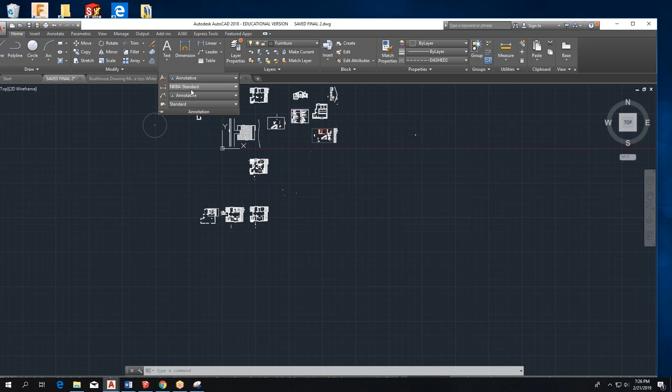When you make it active, you just come in here - so here's a bunch of NKBA styles, but the one that I really like, I fixed it this year a little bit, NKBA standard, it's active there. Then when I go to dimension, I can click on an object, and there's my dimension style.

Another thing about NKBA dimensions standard - I want to get to a smaller object so you can really see how it'll work. If I'm going to dimension, I could go from here to here. For the NKBA, when we have dimensions, I'm just going to show you to prove that it's true - NKBA dimensions.

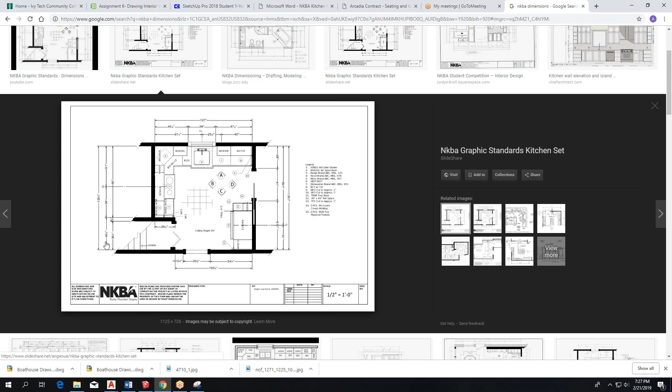And we use images. This is a fine one. See how when they're on the left and the right, they should be running vertically? The style I'm giving you is totally fine to do this stuff, but when it needs to go vertically like this or in your elevations - here's an elevation. See, we should be good for the elevations, but if you ever want to dimension a plan, see how we're going to get really close in here.

Here's their inches. So if you ever need to go vertically with it, it's another step. You have your dimensions, you click on linear instead of the standard dimension line. I would go linear, then like this, then type A, enter, then say 90, enter, and that turned the text rotation to be 90 degrees up, so it could go up the side. Otherwise, like our elevations, the style I'm giving you should be fine to just do it this way and have the text going that way, as long as it's in inches instead of feet and inches, which is different for kitchens and baths than it is for overall floor plans and details.

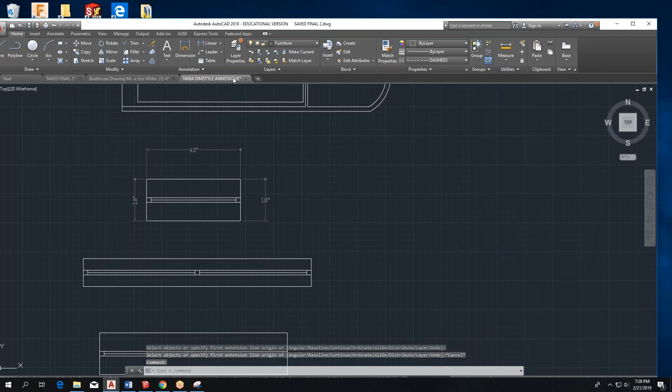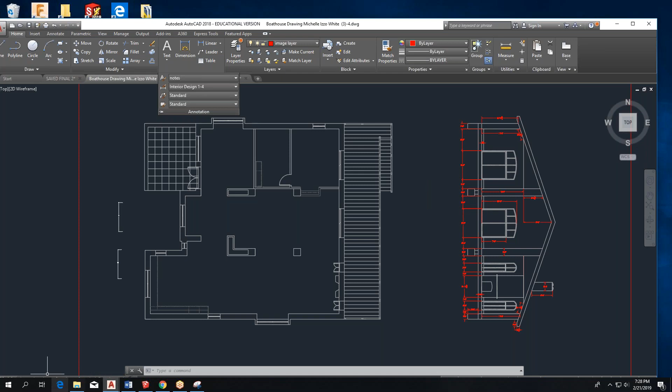So I will give you that. Again, all you're going to do is receive a file that has one dimension. You select it, copy it, go into your drawing and paste it, and then underneath here it'll say NKBA-standard, and you'll make it active and start dimensioning, and it'll all work out. So that's just another little thing I'm giving you to use as you prepare for Professor King's class.